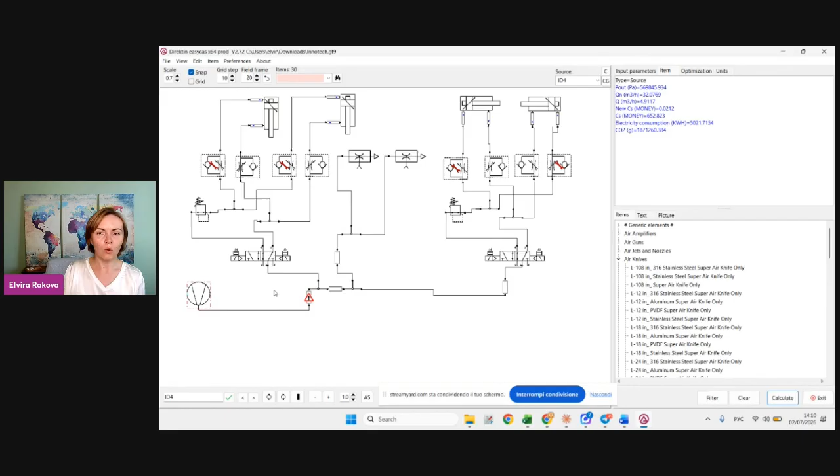It is extremely important because when we size systems, when we size compressor systems, when we have other production lines, multiple of them, we always need to know what the demand actually is, how much we need to provide in order to produce, in order to save energy and not oversize our systems. Because conventional software doesn't tell you that the system is oversized,

because you simply say, okay, here I have 2000 liters per minute, 8 bar, what do I get here, and you get some dynamic parameters. Instead, we reverse the problem and say, here you have different consumers, users of compressed air: cylinders, ejectors, air knives, jets, nozzles, and so on. I need these components to provide me this force, this cycle time, this stroke.

I have these frictions there, this tube length. What is the optimal pressure and flow to supply all these consumers? And this is extremely important, because we're actually sizing the system correctly.

And until my retirement, I will be pushing to size systems according to the demand, and not just design systems using the components that are just sitting on the shelf.

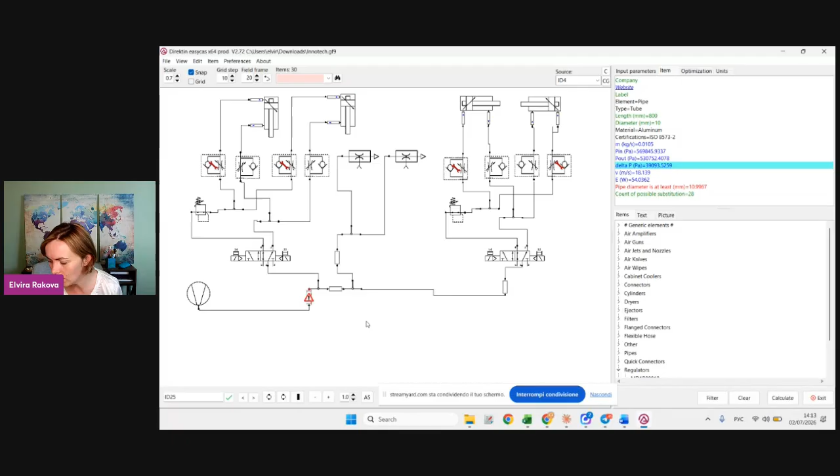And conventional softwares don't give you these alarms. So you simply need to find, in all your millions of actuators, where I have the problem. Here I already have the problem because I can see it, because I put in my optimization criteria what has to be the maximum pressure drop, so that the software will find this component.

And this is basically the first huge thing, as well as this kind of sizing range. You also can see it helps you to check the velocity of the cylinder. The logic here is way more intuitive, because the more simple it is, the more work we actually put in the background for this. And here you can see that it's more intuitive. You just put the components together, and then you can see what has to be the supply of this.

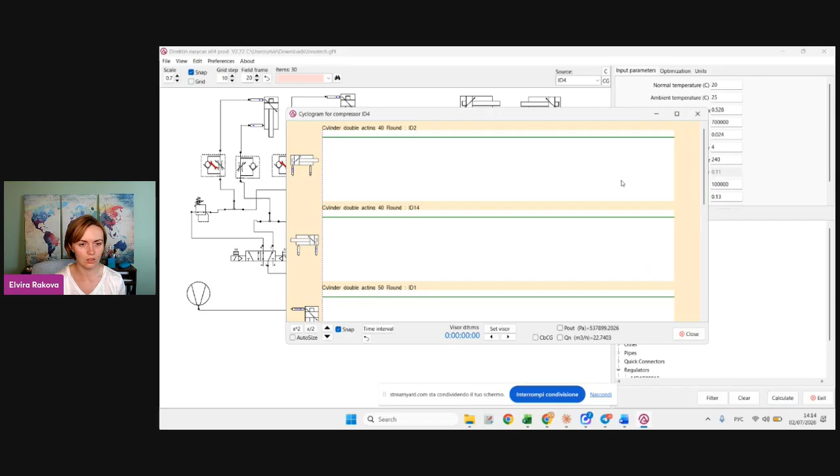And talking about this, I would like to go a step further, because what is also extremely important is that not all consumers work at the same time. Not all end users of compressed air work at the same time. So we have a certain cycle for them, and we can set up a cyclogram. For example, let's say my maximum time is 20 seconds. And I can start setting up the cyclograms to get flow profiles.

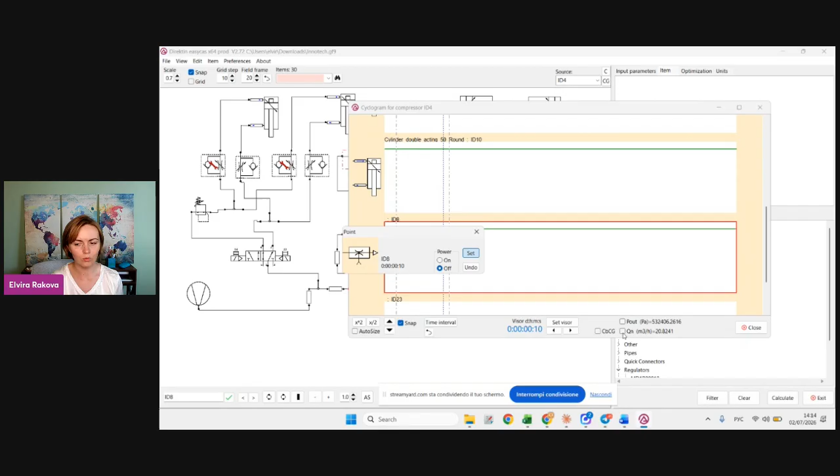Meaning that I can switch on, switch off different consumers, different users. And then, let's go, for example, here, and I can see the actual flow profiles and pressure profiles. Why is it good? Because we can simply get into the system. We can get the understanding for the sizing of the filter. So here we have the flow profile over the cycle, the maximum flow, and so on. We also know what the pressure drops are inside the system. So this gives us a lot of information.

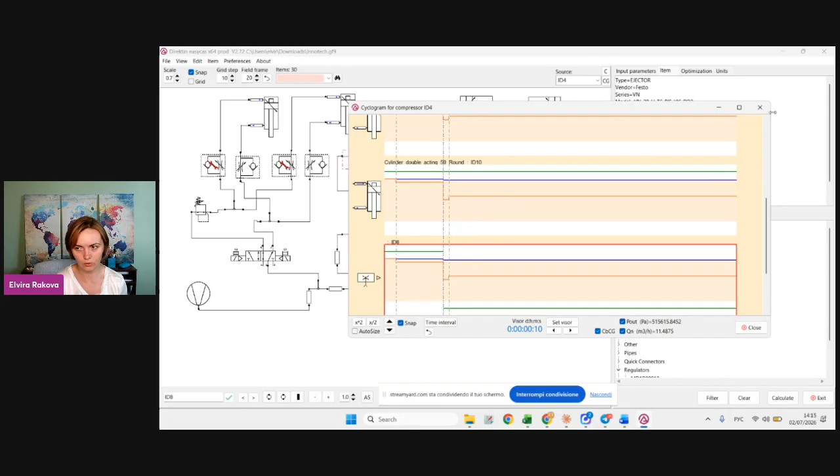I don't know, there are some softwares that can give you this information, but I know that in pneumatics it doesn't work like this. It's a bit hard to get the cyclogram in some softwares, only when you can calculate the logic of those components. So this is the second. And the third, well, the fourth, we'll have a lot of them.

Another thing here is that you don't really have to put every single component to get your calculations done. Of course, here we have some elbows, some connectors, some other connectors, and in order to calculate the pressure drops I can get into the details, but sometimes I just want a first idea of the sizing, of the flow. I have, for example, here my flow, and I can see here I have an undersized pipe. Here is the flow I need to size my filters, my regulators, my air preparation block.

So I can go into as much detail as possible, or I can simply put this as one consumer, a couple of consumers, and calculate the pressure drops and the flows for two production lines that are, for example, shut down in a certain sequence. I don't have to put, for example, here, you see, I didn't put the exhaust because I simply didn't have time to put the exhaust.

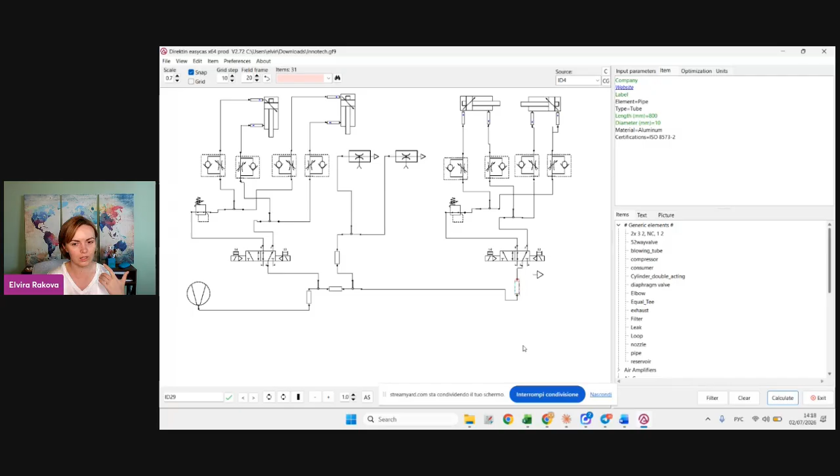Green with green, extremely simple, extremely intuitive. So if I change here, for example, some pressure regulation and do the calculations again, you see that I now have a problem, and the problem says this has to be your pressure level, and you basically just need to change this pressure level for this regulator. In conventional software, if you use a big simulation tool, of course, it will not give you this mistake. It will give you crazy results in the output of the cylinder that are physically impossible.

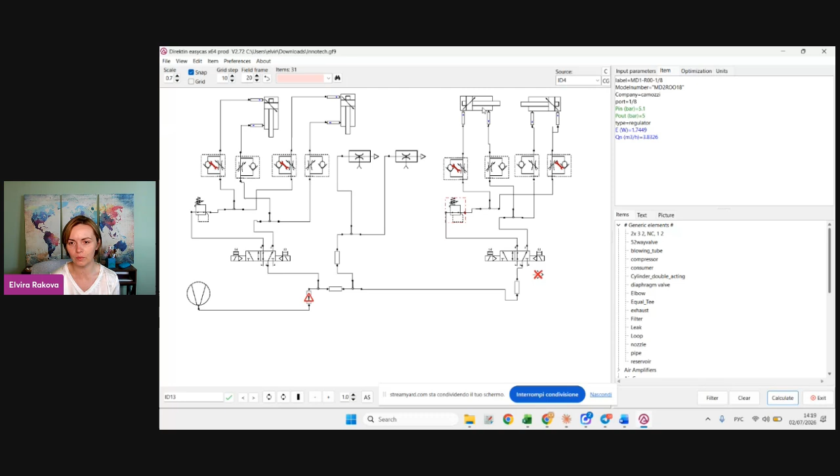And as an engineer, you actually need to know what you expect at the end. And this is an extremely difficult thing that I noticed, because you usually need to have one person in your company who knows the system very well. And once he or she simulates it, they actually need to know what to expect. Here you don't need to know what to expect, because the software will simply tell you, okay, this is your maximum velocity, this is your calculated flow rate for this velocity.

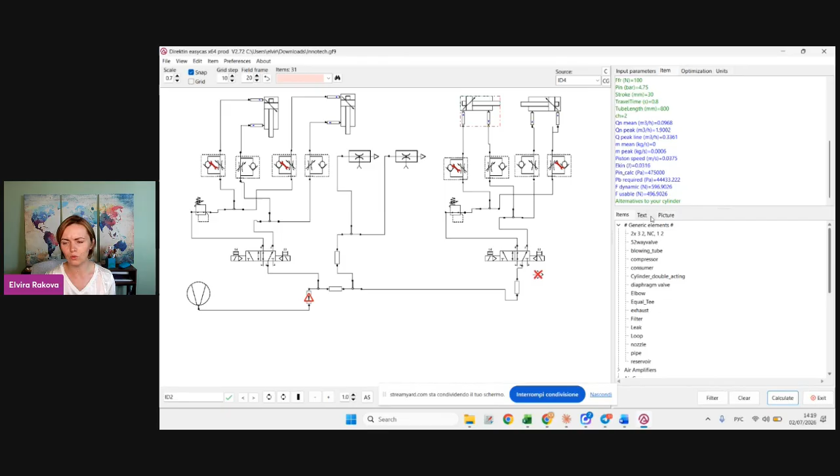So it will give you all the possible information for cylinders, for other applications, and so on. What is the peak flow rate? What are the usable forces that you can have? All this information actually makes sense, and we could achieve it thanks to two things. Of course, an amazing team of engineers, and mathematical models that we validated in the lab. Please note that they're validated on the test rigs.

I'm going to stop sharing. There are a lot of software tools that actually don't validate on the test rigs. They simply put some white papers into calculations, and I was actually shocked when I learned about it. I remember I put something on a test rig, and I saw that it didn't match the results of the simulation.

And another thing is that it's extremely simple to start. You can actually check the system within a few hours, maybe days if it takes more time to set it up. But it's actually not a very sophisticated modeling and simulation software. Of course, it doesn't have a 2D simulation, like calculations of velocities and flow over time. This is sizing that gives the maximum and minimum parameters. We have online tools for cylinders and some other applications for 2D simulation, and I think at some point we will integrate them here too.

But you actually don't need it. When you only do the sizing, when you do energy consumption calculations, for example, if you want to check whether the system will work at lower pressures, you don't really need 2D simulations. If you want to check the dynamics of the equipment, then yes, you need 2D simulations. For these applications it's really not necessary, and this is why we are building it this way. We are continuing, and we are adding more features.